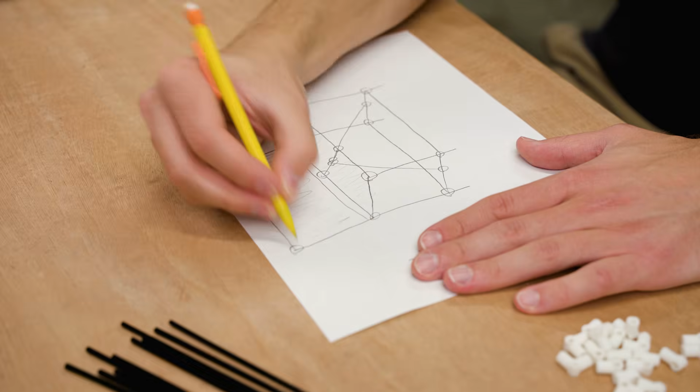This is a series where we're walking you through the complete process of building a DIY project with EMT conduit and clamps from MakerPipe.com. In the first few episodes, we've covered just about everything you need to know about those two materials. We've talked about where you can find them, how to use the tools that you need for building, and we've highlighted the different features that make them accessible and approachable for building just about anything you can imagine. I hope by now you're getting excited about the idea of building your project and solving your problems with the help of conduit and clamps.

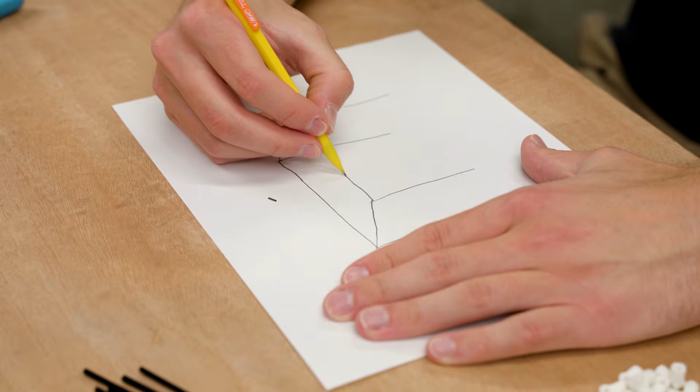The next step to making that happen is to design and plan your project, which is exactly what we're going to cover in today's episode. We're going to walk through the process of sketching and modeling a build and then create a connector and cut list. This part is really fun because you get to problem solve and envision what your project is going to be like when it's finished. This is the first major step in making your project into something real.

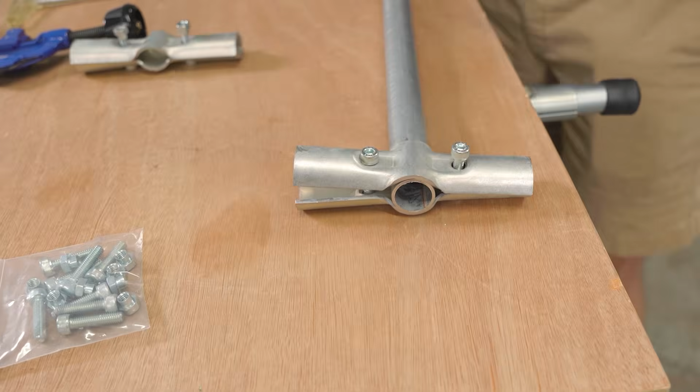I've been wanting to build a small rolling workbench for a while, and now is a great time to do it because conduit and connectors are the perfect materials to help make it happen quickly and affordably. This is optional, but before you start planning your project, it can be a good idea to see some examples of similar builds that have been built by others. You can do this by checking out the MakerPipe Build Gallery or spending some time in the community section of the website. Our YouTube channel is also a great place to get some inspiration for your builds. With that said, let's dive in and plan a project.

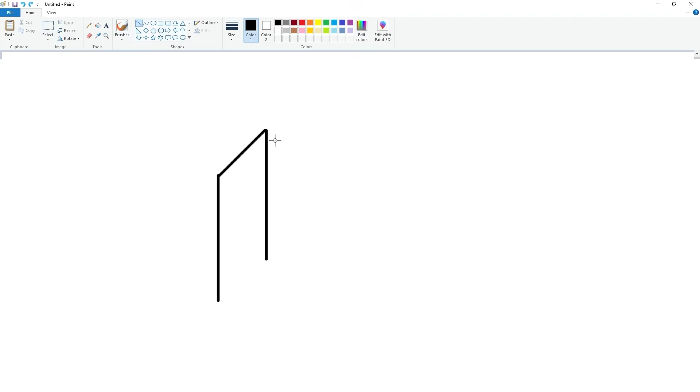The key to planning any sort of build is to first get it out of your head and turn it into a visual that you can use for planning and designing. This can be done in a number of ways. A lot of builders start with a line drawing on paper, which is a simple and easy way to get going. At this stage, don't worry too much about connectors or accessories and where they might go. You really just want to take the visual of what you want your finished build to look like and turn it into a simple line drawing with basic shapes like rectangles, triangles, and so on. It really helps if your basic drawing is three-dimensional.

For my workbench, this is going to be pretty straightforward. I want my workbench to have 4 vertical legs. There's going to be a work surface on top, so we need to support that somehow. I think I want the worktop to overhang the framework. Because of this, I'm going to add a rung around the top of the frame, which will help to support the work surface. Now I could stop here and have a decent framework for a workbench, but I want to make sure this can support some heavier things on top and be solid.

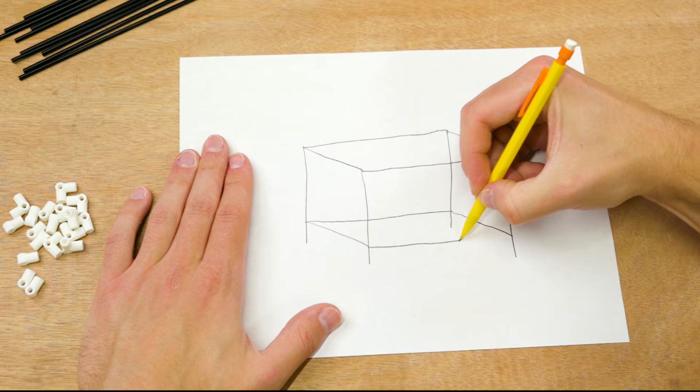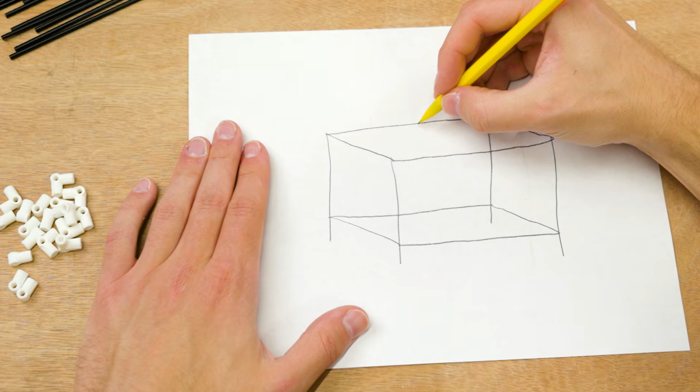Adding some lower supports to the legs will help a lot with the lateral stability of the frame. We don't want it to wobble or be shaky, especially with materials and tools on top. A good way to eliminate this from just about any build is to add some horizontal braces between the legs. This will help a lot with the overall stability of the frame. I also expect to have some heavy things on top of this workbench sometimes, and I don't want the frame to flex or bend in the middle, so I want to add a couple of angled supports that will help transfer the weight down to the sides. This should help take some of the stress off of the top rung.

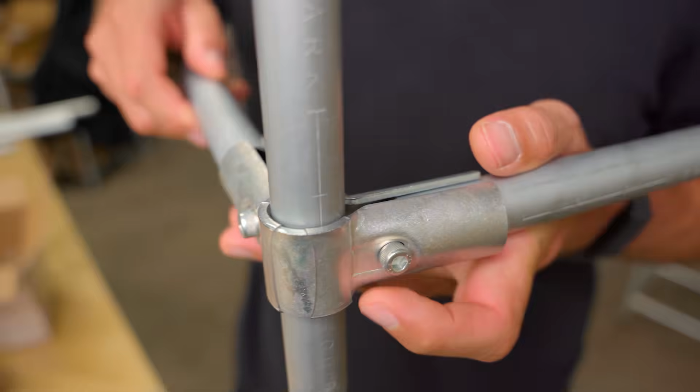We're pretty much done, but I need to add one more thing. One of the best parts about DIY projects is the fact that you can customize them for your own specific needs and interests. As you can imagine, I tend to build a lot with conduit and connectors, and I misplace my tools and hardware pretty regularly. On the back of this workbench, I want to add some pegboard which will allow me to hang up my hand tools and also add some storage bins for loose hardware and other things. Now I'd say we've got a pretty good design which will allow us to start planning things out in more detail.

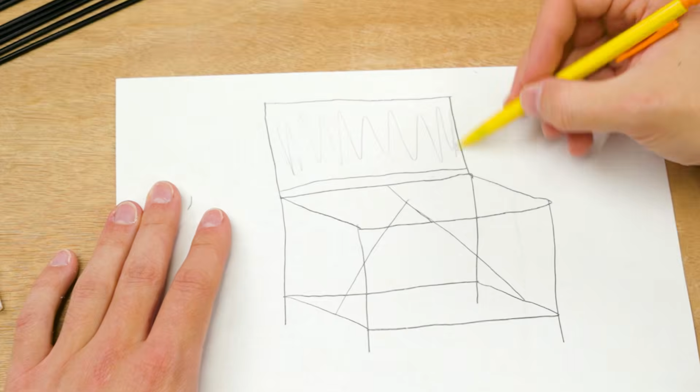This includes figuring out our dimensions as well as a list of connectors and materials. Before we jump into that, I want to briefly mention that sometime during this stage of the planning process, you will likely wonder which conduit size to utilize in your specific build. If you're unsure, I recommend checking out the resources I mentioned earlier so you can see builds and the different sizes in action for real-world expectations. More often than not, we see builders choose 3/4 inch EMT because it provides a fantastic balance between strength and value for builds. That's what I'm going to use for my workbench.

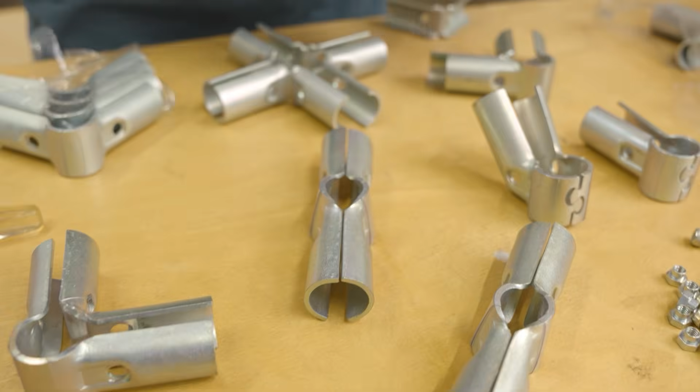There are a lot of connector options on the website, and they allow you to do different things within your projects. We have a full walkthrough of the MakerPipe system that I'll link down below so you can get familiar with the different connectors available. You can also refer to the product pages on the website to see pictures of each connector, which is helpful as well. Either option will go a long way when it comes to helping you choose the right ones for your build. I typically figure out which connectors I need in one of two ways.

The first is to simply look at your drawing and circle anywhere that you have a connection point between your lines. This is typically where you're going to have a connection point in your final build as well. For example, look closely at the corners of my workbench. We can see that there are 3 lines being joined together - 1 in the middle and then 2 that come out at an angle to make the corner. From there, I'll go to the website and see which connector would allow me to join 3 pieces of conduit together to create a corner like this.

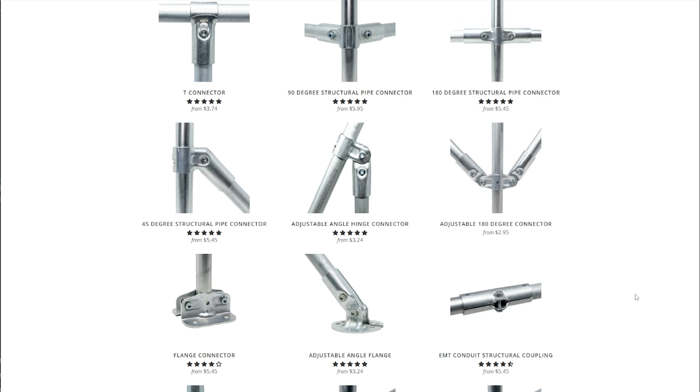There's only a few options that let me join 3 pieces of conduit together, and only one of them creates a 90-degree corner like the one I need. That would be the 90-degree connector as you can see here.

Next, what I like to do is go through the sketch and look for any other places that could utilize the same connector. In my case, that would be all of these corner connections. That means I'm going to need 8 of the 90-degree connectors in total. It's pretty common that this happens when planning builds. You'll often figure out one connection and then realize that you'll use the same connector a few times in your project. In fact, I'll be able to build my entire workbench with a 90-degree connector and one more connector type that we're about to look at.

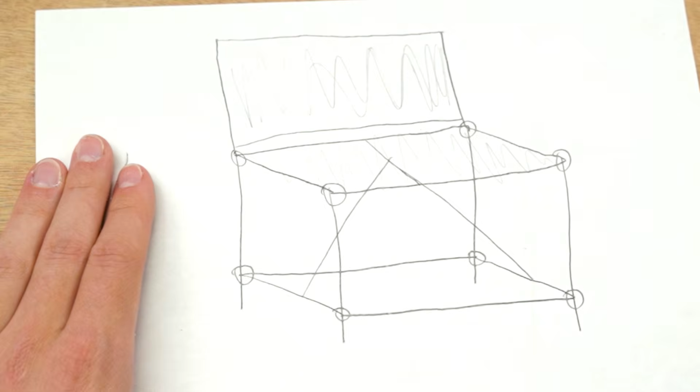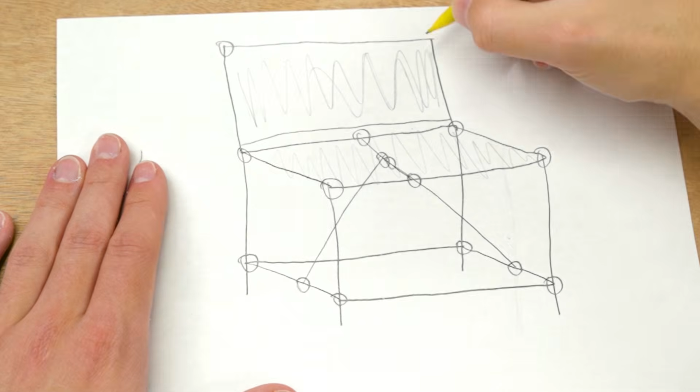We can see that there are quite a few places where 2 lines are connected together like this. If I look at the website and see which connectors would allow me to join two pieces of conduit in this way, there's really only one that makes sense - that would be the T-connector. I can use it for the angled braces, for the crossbar that supports those braces, and for the two horizontal bars on the back of the frame here that will support the pegboard. I will need 10 T-connectors in total for all of these connections that we just circled.

It might be surprising to see that I can make my whole workbench with just these two connector types, but a lot of the times the core components that I mentioned in the previous episode will make up a lot of your frames. Another way that you can prototype and plan out the connectors in your build is with the MakerPipe Mini connectors.

They are 3D printed miniature versions of the full-size MakerPipe connectors. We designed them to connect with coffee stirrers in a way that replicates the process of building with EMT conduit. They're extremely cost-effective for project planning and can be found at MakerPipe.com. They allow you to figure out which connectors you need pretty easily.

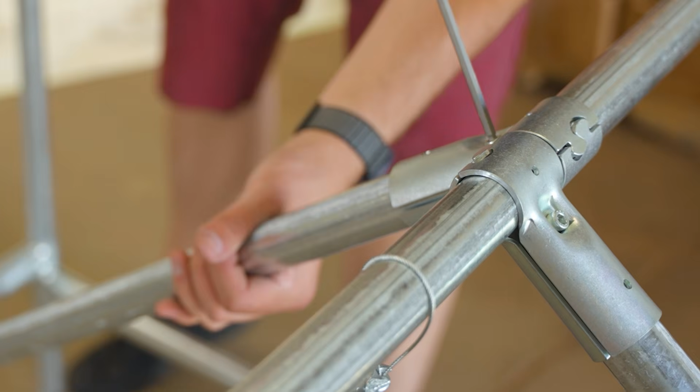You might even find it helpful to model your project and see a tangible version of your framework, even if you've already sketched your build and found the connector list before now. Modeling with the minis is also helpful because you'll basically be practicing the assembly of your full-size conduit build. That's what I'll be doing here with my model. I'm going to use some of the miniature 90-degree connectors and T-connectors to model out my workbench. Now, as I said, these are meant to replicate the full-scale connectors and conduit, so this is going to be a pretty accurate representation of my final project.

And just like that, I have my miniature model of my build. Now we can move on to figuring out our cut and material list for our project.

Oftentimes, you will likely be building within a confined space, or you might be incorporating materials such as wood in your build and have constraints for the dimensions that you're working with. That's how it is for me.

I like to use these project boards from Lowe's whenever I can. They are pre-cut and cheap enough that I can replace them if they get damaged over time. The one I'm using for this workbench is 2 foot by 4 foot and 3/4 inch thick. I'm going to work within these dimensions to figure out the measurements of my conduit framework.

We have a separate video dedicated to creating cut lists that I'll link down below. For now, I'll just mention some of the highlights as I create mine.

I also mentioned this in the last episode, but the most important thing to know is that the orientation of the connectors will affect the overall measurements and cuts in your build. Sometimes a connector may add length to the conduit or replace sections of your frame. This is crucial to keep in mind so that you get correct measurements the first time.

This is another reason why the mini model is helpful. You can see the difference in the connections within your frame and plan your cut list accordingly.

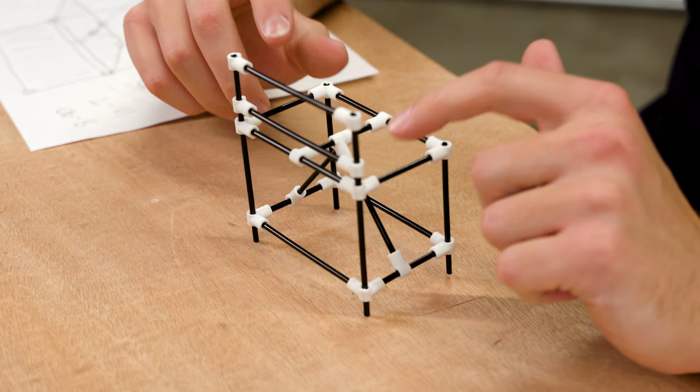For example, if we look at the 90-degree corner connections in my mini model, we can see that the vertical legs are running continuously through the 90-degree connectors. The front two legs will stop and sit flush with the top of the connector so that the workbench can sit directly on top. The back two pieces of conduit are going to extend up a couple of feet so that they can support the pegboard.

Since the legs are running continuously through the connectors, we don't have to worry about them adding length to our conduit, so I can just set my vertical height at 40 inches for the front two legs.

Something I do have to account for is the casters that I want to add to the bottom to allow the workbench to roll. These add 4 inches to the height, so I will need to subtract that from my 40-inch measurement. This means my two front verticals will be 36 inches tall.

For the back verticals, I need to make sure to accommodate for the pegboard. Usually in a project like this, I might just leave the vertical legs pretty tall until I had the pegboard in place and can figure it out in the moment. For the sake of this video, I will be a little bit more detailed.

I've been wanting to try out these metal pegboards for a while, so I'm going to pick them up for this build. They are 36 inches tall, so I want to make sure to add that to my length from before. I will add a few extra inches that I can cut off once I get the pegboard installed. Let's just call it 80 inches for now for the back legs.

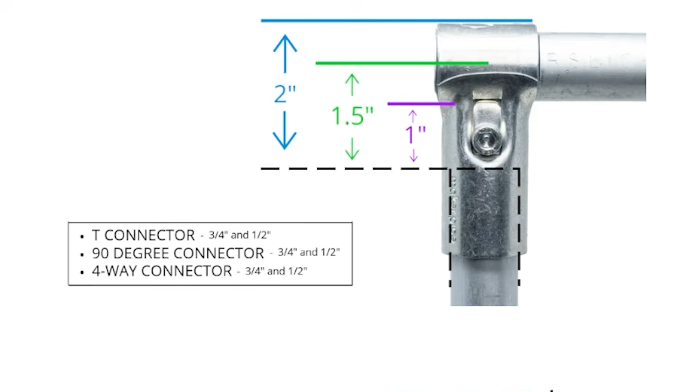The other two pieces of conduit that connect in the 90s are the ones you have to watch out for when making your cut list. They stop inside the connector, which means there's going to be some added length that we have to account for. I'll put a reference guide in the description so you can see what these different measurements are for the different connectors and the different sizes.

In my case, the 90-degree connector for 3/4 inch EMT conduit will add 2 inches to the length. Since I have one on each side, I will need to subtract 4 inches from my horizontal width. I also want the workbench to overhang about 1 inch on both sides, so I'll need to subtract another 2 inches to accommodate for that. So to get my desired width, I will need to cut the piece of conduit down to 42 inches.

Earlier when we were looking at connectors, I mentioned that you're likely to use the same connector type in several different spots in your build. It's very similar when you're creating a cut list.

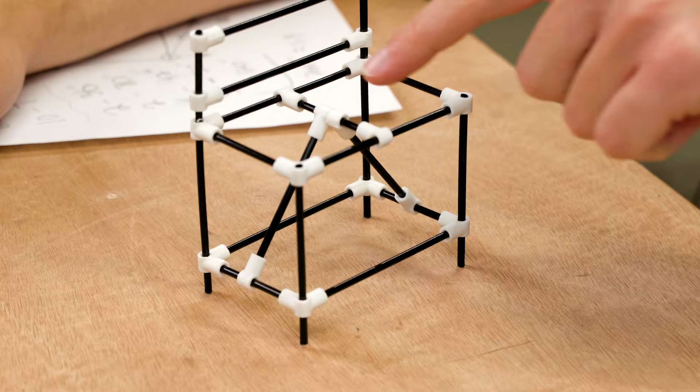That measurement that we just found will be the same for all 6 other pieces of conduit that make up the width. Similarly, these 5 pieces of conduit that run front to back are all going to be the same length, so we just need to figure out one of them.

We already know that the 90s add 2 inches of length, and we have 2 of them in this span, so we need to subtract 4 total inches from the length.

One thing that's different on these is that the rear vertical legs extend up, so the work surface will butt up against it. This will cause the front lip to extend over the frame by about 1 inch, which means I don't have to worry about calculating the overhang this time around.

With that, I've got the measurement of these 5 pieces of conduit, which will be 20 inches. Lastly, we need to figure out the length of these 2 angled braces.

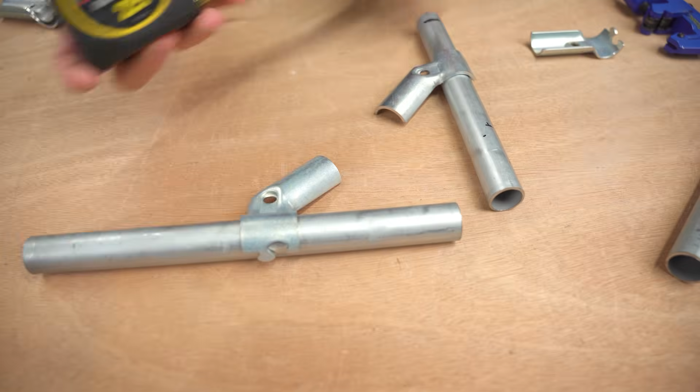For angled braces in projects, I don't usually calculate them in my cut list, because we'd have to do a lot of math to figure them out, which is a pain. When we build a project, I'll show you a trick that makes it really easy to figure them out. For now, it's safe to assume that one extra stick of conduit will be enough for them, so I'm going to add that to my list.

Now that we have all our measurements, we can add them up and figure out how many 10-foot sticks of conduit we need to get from the hardware or home improvement store. For me, that comes out to roughly 5.9 sticks of conduit. I'm just going to round that up to 6 and get that from the store.

Now we are getting really close to the fun part of the process, which is putting it all together. Before we can do that, we'll need to order our connectors and supplies from MakerPipe, and then order or pick up the rest of our materials and accessories as well.

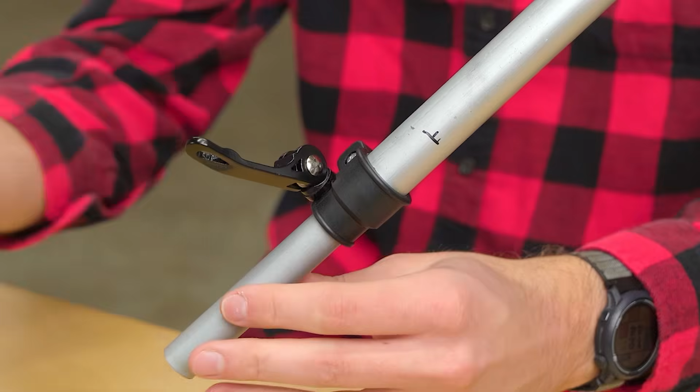Before you place your MakerPipe order, it's a good idea to think about the hacks or custom solutions and accessories in your project. Some of them can be found on the MakerPipe website, which means you can order a lot of stuff at once to avoid multiple orders and shipping fees.

I mentioned the tabletop from Lowe's that I'm using already, so that's covered, but I'm going to need to secure that to my framework somehow. After exploring my options, I'm going to use electrical one-hole straps. They come in a pack of 4, so I'll order 1 pack.

Remember how I said I wanted the workbench to be able to roll? There's a few more things like casters and end caps that I can go ahead and order as well. If you don't have tools to build, then you may want to pick those up now too.

I don't entirely know if this is going to work how I want, but I'm also going to order some threaded pipe inserts and hanger straps. I think those will come in handy when mounting the pegboard.

This is a good time to mention that you're likely going to need some hacks or creative solutions to get your build just right. Here on the channel and in the community, you can see a lot of creative solutions to problems that other builders have come up with and used in their builds. If you can't find a solution or hack for your specific problem, feel free to reach out and we'll do our best to help.

Now with everything added to my cart, I can go through the checkout process and place my order. We ship out orders every weekday and do our best to get them out ASAP. You'll receive your tracking number through email once it ships so you can follow along.

While you're waiting on your MakerPipe package, you can head on over to your local hardware or home improvement store to pick up your EMT conduit and other items that you need.

In the coming episodes, we will unbox our MakerPipe connectors and accessories and start the fun part of actually building our project. I hope you guys are finding this series helpful and are getting some confidence to build your own DIY projects with EMT conduit and clamps.